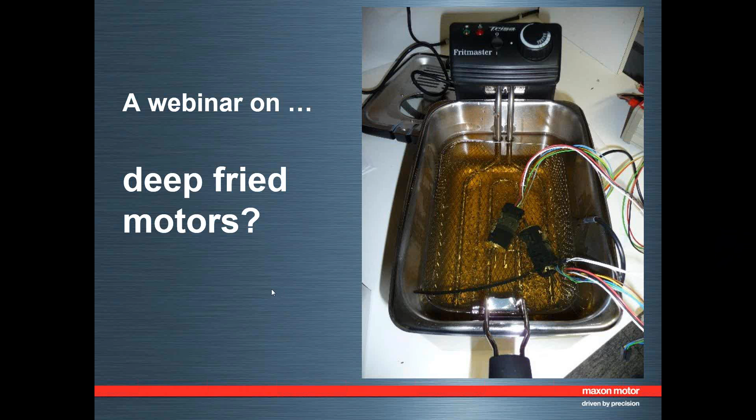Hello, my name is Kafader, and I welcome you to this webinar on extreme environment operation of DC servo motors. So we will talk about the challenges and what needs to be required by these drives.

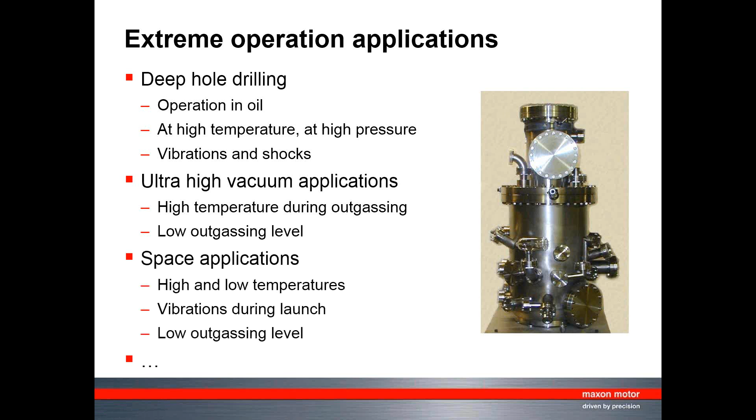Now, what are extreme operation applications? Some examples are deep hole drilling, where you have operation in oil at high temperature, at high pressure, with vibration and shocks. Another area is ultra-high vacuum applications, where the challenge is the high temperatures during outgassing before you put it into the high vacuum, and then in the vacuum you want to have a low outgassing level. A third application field is space applications, where you have high and low temperatures in very short periods of time. You have vibrations during launch, and particularly if you have an optic satellite, for example, you also want to have a low outgassing level.

Now, how do we organize this webinar? We have split it up into two parts. First, I'll give you background information on DC motors. We'll talk a little bit about how to select motors, about the key motor parameters which are needed for selection. Then I will tell you a little bit about brush DC motors versus brushless DC motors and how we ended up with this Maxon heavy-duty EC motors. In the second part, Robin will take over and he will tell you about testing of these motors, and with the testing you will see what these motors can really do and what they can support.

Okay, let's start with part one, the motor background.

When we talk about selection of motors, we have developed a systematic selection process consisting of 7 steps. For me, the most important one is always the first step. It's gaining an overview, knowing exactly what you want to do with your drive, and how the situation looks like.

In this overview, you also define what the ambient conditions are, how you want to communicate, how the control should look like, how accurate it should be, and of course how the mechanics looks like and how the load should be moved.

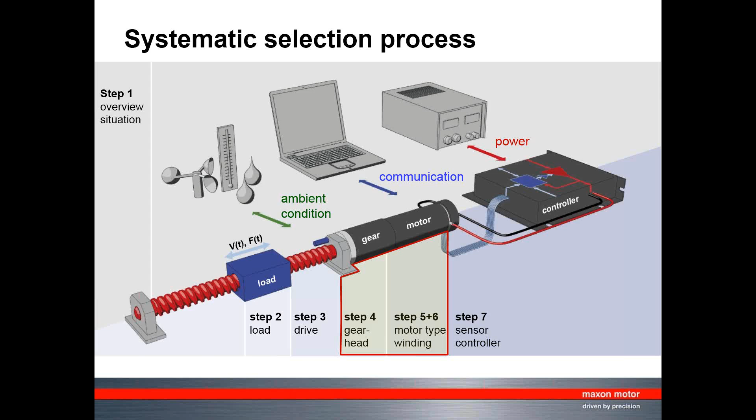One way of looking at this is considering the drive system as a black box. This helps quite a lot in the situation analysis. So you first define what you want to do, what's the task of your drive, and then you have to make sure that the outcome of your task is the correct one for what you want to do.

You also have to look at power considerations. Is there enough electrical power, current and voltage, to do whatever you want to do from a mechanical point of view - mechanical power given as force and velocity, or if you have a rotational load, torque and rotational speed.

Today we will focus a bit on the green sections here. It's about environment. What is the temperature around the motor? What is the atmosphere? Or is there any vibration?

But always think about that a drive also creates emissions, which go the other way. So a drive also creates heat, makes noise, and in some cases also electromagnetic emissions.

When talking about application, essentially at the end what the motor must do is deliver a certain amount of torque at a given speed. This is our standard diagram, how we represent such operating points of torque and speed - it gives you the speed as a function of the torque.

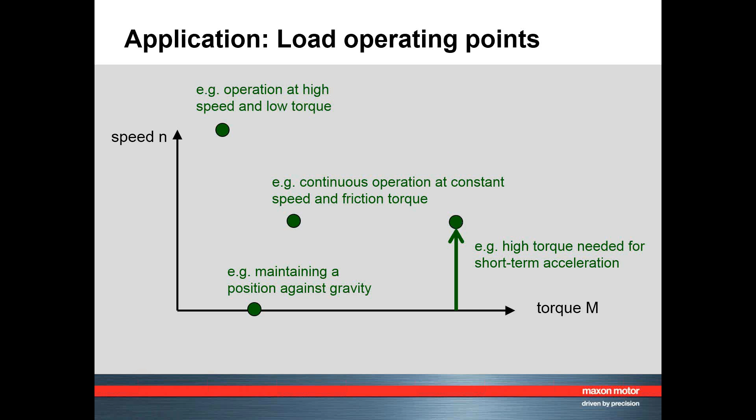Or during acceleration, you have a speeding up of your drive, which usually needs more torque to accelerate all the mass inertias. At the end of this acceleration process, you typically have the highest torque and the highest speed. Now, the first thing you have to consider is that your motor has high enough speed to cover all the operating points.

In this case here, what you can see is that the operating range is limited by the maximum permissible speed, and it cannot reach this operating point at high speed.

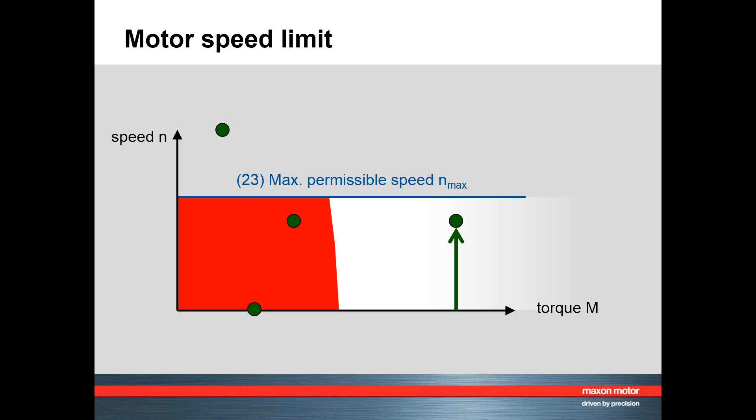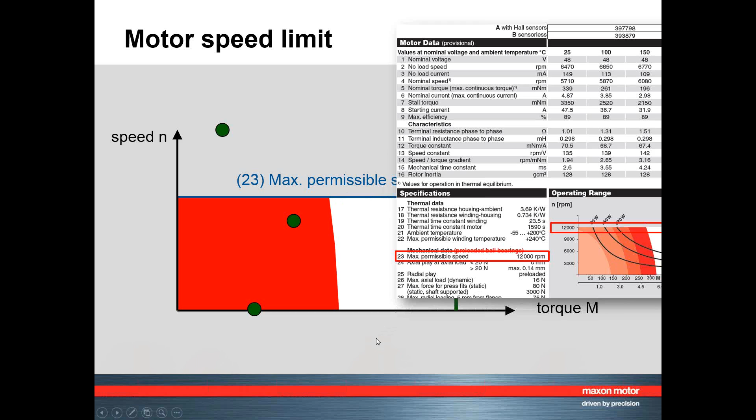You find information about the maximum permissible speed of a motor in the maxon catalog, for example in line 23, or in the diagram - this is the upper limit of the diagram. So speed usually is a simple task to find out.

A little bit more complicated are torques. How big is the torque to accelerate? How large is friction? So there's a bit more time and effort involved to get all this information.

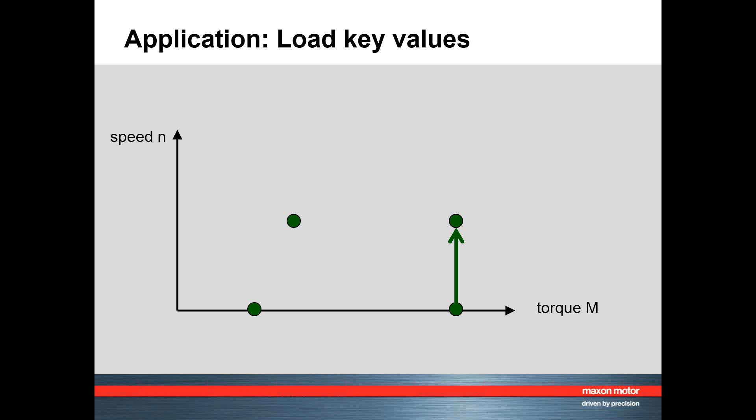At the end, if you have all these operating points, what you can do is condense them into essentially 3 values. One value is an average load. It corresponds to the root mean square average over operating cycles - that's essentially the continuous load, or in other words, the motor would heat up in the same way during an operating cycle as if it was driven with this root mean square average load.

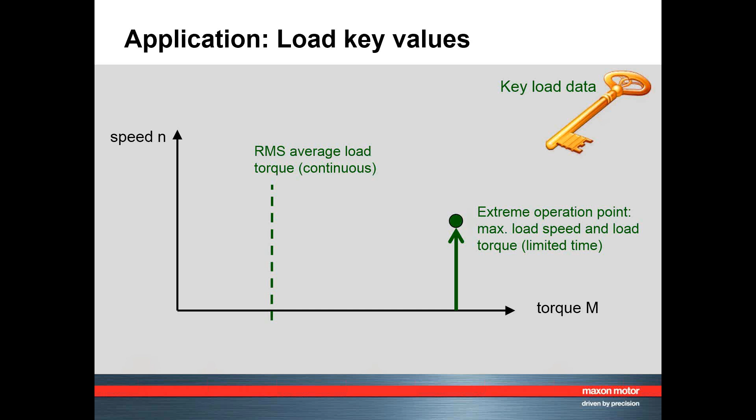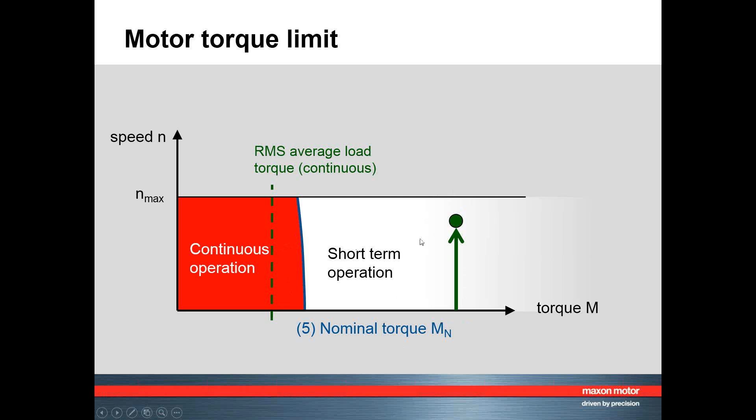Another important point, or two other key values here, is the maximum load at maximum speed, which I call the extreme operation point, and the amount of time it takes to run the motor at this point. From a torque point of view, you have to make sure the continuous operating range extends higher than this root mean square average load. So what you need is a motor with a nominal torque higher than this RMS average. Short-term operation can still be at a higher torque.

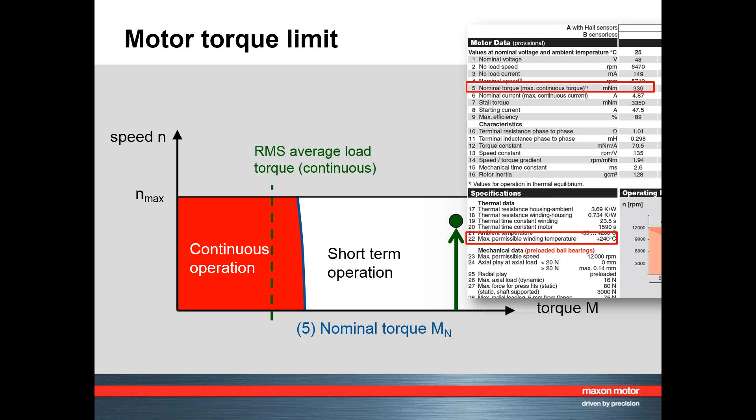Where do you find information about this? It's in nominal torque, line 5 of motor data, and the nominal torque is actually a thermal limit. So operating a motor in the short-term operating range would result in too high a temperature, and the critical temperature in motors is the winding temperature.

A very good example showing that the limits of the continuous operating range relate to temperature and how hot the motor gets is the heavy-duty motor operating range. Typically for standard motors we give such a diagram with the red area corresponding to the continuous operating range. If the ambient is hotter, for example 100, 150, or 200 centigrade, you can see that the hotter the ambient is, the less heat can dissipate, and that's why this border of the continuous operating range is reduced more and more.

It's not only ambient temperature that plays a role, but also how heat is dissipated. For example, in oil you have much better heat contact to the winding which gets hot, so heat is dissipated much better, which in turn means you can have much higher torque operating such a motor in oil than in air. This is exactly the same motor, once operating in air and here in oil, and you can see from the scale of torque M that you can reach much higher torques when operating in oil.

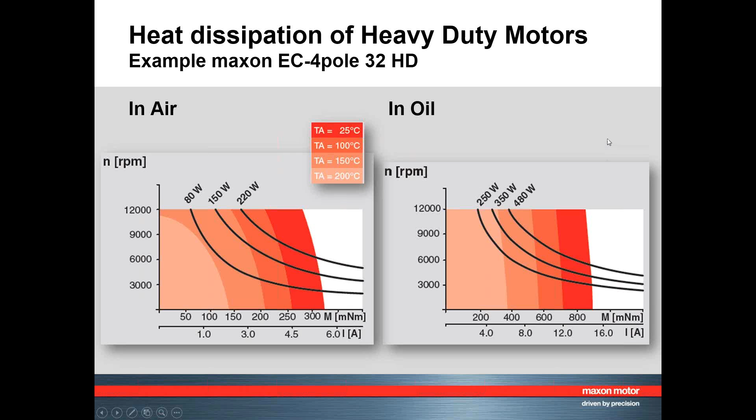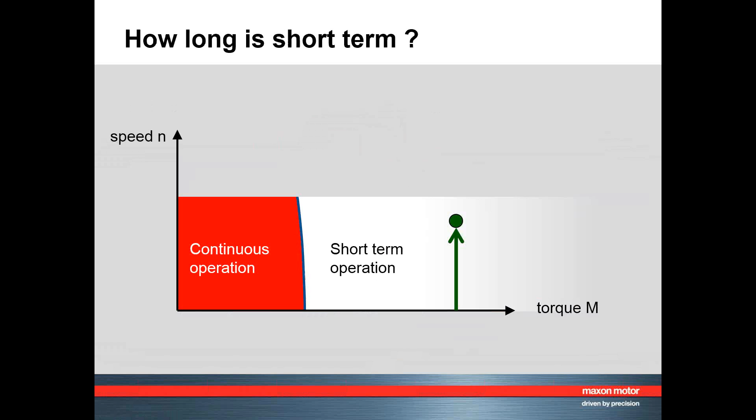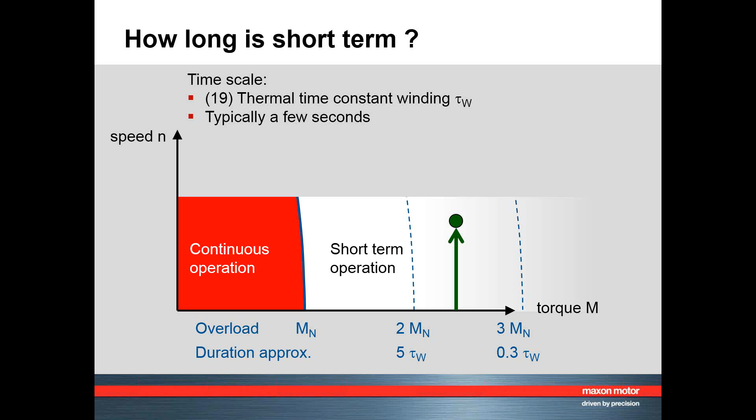As I've mentioned, you can run the motor at higher torques, but only for a limited amount of time, and the big question is how long is short. It all depends on how fast the most critical part of the motor, the winding, heats up. This is given in line 19, a number called the thermal time constant of the winding, which gives an internal time scale of the heating of the winding. For this motor, for example, it's a little more than 20 seconds.

What does this mean, or how is this diagram to be interpreted? You can see that you can load the motor up to twice the continuous load quite easily, and for quite a long time, about 5 times this thermal time constant. For this motor, that would correspond to approximately 100 or more seconds, almost 2 minutes. So short-term operation can be quite long as long as the overload is not too high.

But you can also see that at 3 times the continuous torque, the duration is much shorter than this thermal time constant of the winding. So essentially, between 2 and 3 times the continuous torque, the allowed time is reduced quite a lot. As a rule of thumb, at approximately 2.5 times the continuous torque, it's this time constant that determines how long you can overload your motor.

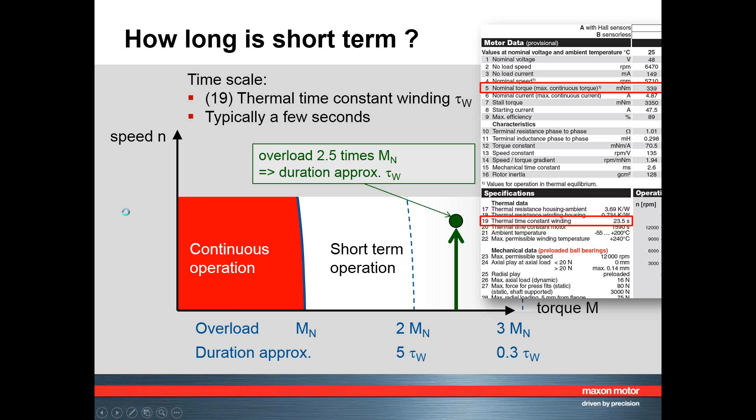So we've been talking about torque and speed, and how about current? The most important thing to know is that motor current is proportional to the produced torque, with a proportionality given by the torque constant. Essentially, for each torque value there is a corresponding current value, and that's why you can draw a current axis in parallel to the torque axis down here. You find the necessary information directly here: for the nominal torque there is a corresponding nominal current, and the torque constant is in line 12.

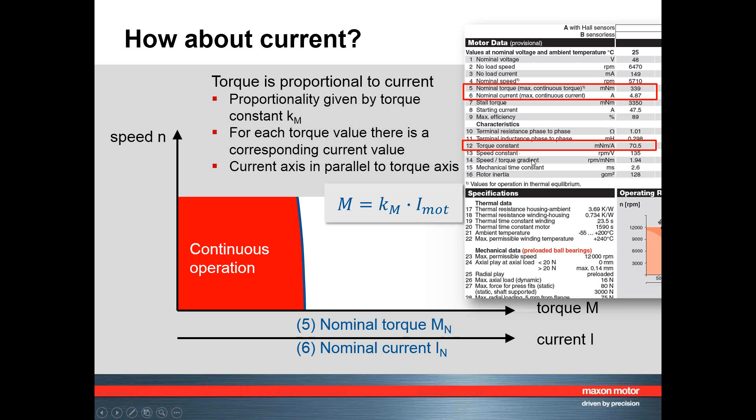What happens if your current is limited? For example, you have a driver with a limited amount of current, a continuous or short-term current limit, or a power supply with a limited current. Of course, as we've learned, limited current means limited torque, so in our operating range diagram these areas are reduced. For our situation here, the big question is how can we accelerate, because we don't have enough current to do this acceleration. So probably you will have to accelerate at a lower rate.

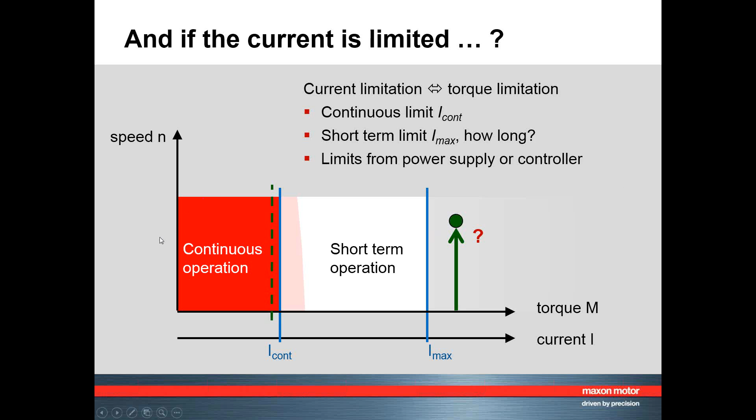Okay, after this introduction about motor data, I'd like to show you the two main construction principles of DC motors. First, the one with brushes.

The magnet which is needed in here is fixed on the flange, and goes into the winding.

The really nice thing about brushed DC motors is that's the most simple motor to run. All you need is a DC voltage. You connect the battery to the motor and it runs, it turns, and the higher the voltage, the faster it rotates.

The other concept is a brushless DC motor. In the brushless DC motors, you don't have brushes. That's why the winding cannot rotate, so it's on the stator part and is in close contact with the housing. This has one advantage: much better heat dissipation.

The other point is that on these motors, it's the magnets that are mounted on the shaft and rotate. What you need to drive such a motor typically is some Hall sensors which give information about the position of the magnet, so that with suitable electronics you can drive this motor.

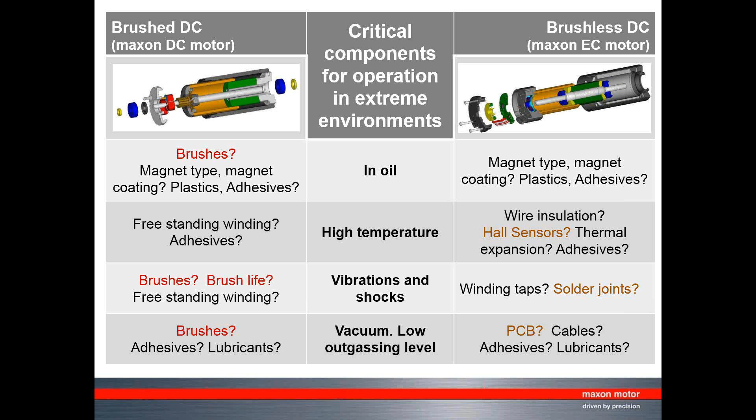But if you compare the two, I think you can see that it's probably much easier to create a brushless, or as we call it, EC motor into a heavy-duty motor.

First thing, avoid any glued connections, and that's why our heavy-duty motor essentially has a lot of stainless steel parts, components which are welded together with laser welding. This gives a very robust design.

Then next thing you have to think about is cable insulation, any plastics you're going to use in the winding or in the cable that go into the motor. You also have to think about winding taps, which are fully potted to avoid them loosening under vibration.

You also have to think about the printed circuit board, making it stronger for high temperature, and also check the Hall sensors so they can support the high temperature. And the last point is to encapsulate the magnet so it never sees the harsh environment, and use a high temperature magnet material.

Very similar things apply if you want to make a gearhead heavy duty. Again, avoid any adhesives, as press fit only will not be well suited for high vibration. We use stainless steel components which are laser welded inside and outside the motor. For applications in oil, we add holes so the oil can flow in and out.

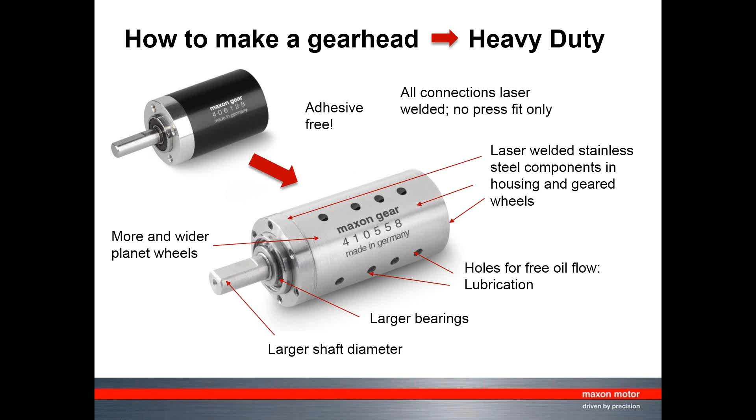This does the lubrication and takes away the heat. So this all helps. And of course, to make a gearhead very robust, you have to think about using special planet wheels inside, a stronger bearing at the outside, and a larger shaft diameter to make it really, really strong. So these were the steps we made, and now in the second part I pass the microphone to Robin, and he will tell you about testing of heavy-duty motors.

Okay, so the second part of this presentation is really going to show you a little bit about how we went through the development process for these motors and the kind of testing that we did in order to demonstrate that they really are suitable for the environment that we want to operate them in.

So I'll just start off on a couple of components, because effectively that's the level that we would start off in the development process. The first question we had to ask ourselves was, how do we come up with a Hall sensor that can be used at these high temperatures? Because as I'm sure most of you are aware, nearly all of the Hall sensors that you get on the market are only rated to slightly over 150 degrees C.

Because we have lots of different types of Hall sensors here for our standard range of motors, we decided the best way to approach this, given that we couldn't find any suitably priced 200 degrees C rated Hall sensors, was simply to test all of the ones that we have. We tested about 20 different types and came up with one type that had the best promise at high temperatures, and therefore we ran lifetime tests on those.

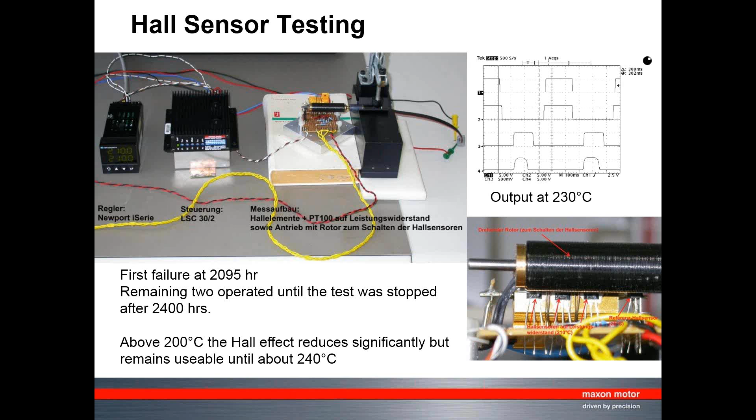The rotor, which Urs briefly touched on earlier, where he said one of the things we do is remove the adhesive from it and encapsulate it. What we actually do here is take a solid cylinder magnet and then shrink a tube over the top of it. Then we take two shaft stubs and push those in from both ends, weld them shut, and then grind them to get everything perfectly concentric. That's how we have our fully encapsulated rotor.

But what we need to do there is confirm that all of these joints are going to be suitable for the stresses they're going to see. So what you're seeing here is what we called our rotor torture test rig, and this just twists it backwards and forwards with 6 Newton meters as the torque rating used here.

This is factors of 10 more than the motor is capable of delivering, and we did 13 million cycles before abandoning the test.

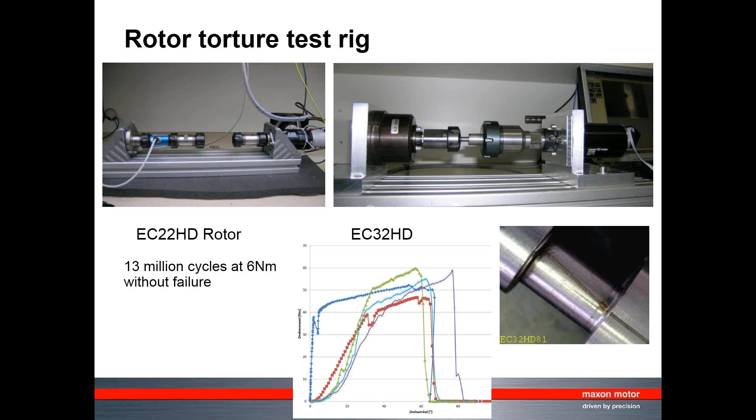Because we don't have exactly the same expansion coefficients for the magnets and the housing, since they're different materials, we had to confirm that over the full temperature range we still have the press fit, because otherwise the magnet will rotate inside the housing.

So we first performed 10 temperature cycles between minus 55 degrees C and plus 300 degrees C, so the material has a chance to go into the slight plastic deformation it will have at very low temperatures. After doing that 10 times, we heat the whole thing up to 300 degrees C, and then try to forcibly rotate the magnet inside the housing to confirm that the torque required is significantly more than the stall torque of the motor.

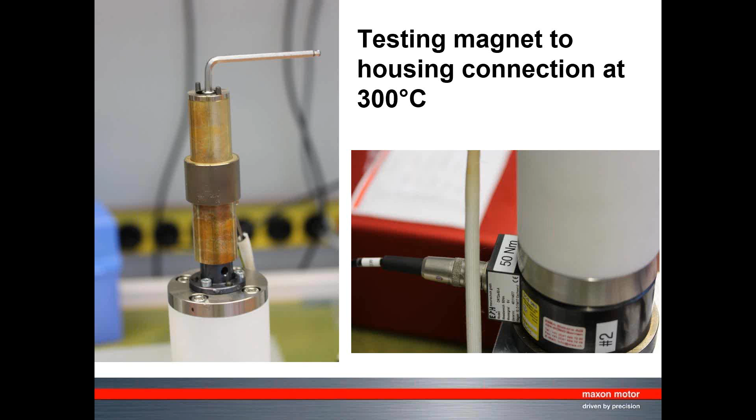So that's just two examples out of many I could have shown for the overall testing of the components.

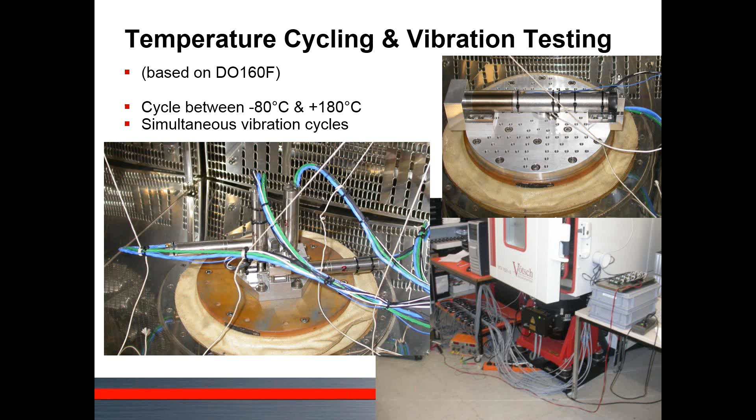Then comes the question, how do we do the testing in oil? Originally we looked into the formal test facilities you can buy for doing that, and decided they were far too expensive for us at the beginning, when we didn't know whether we were really going to have a market in this area or not.

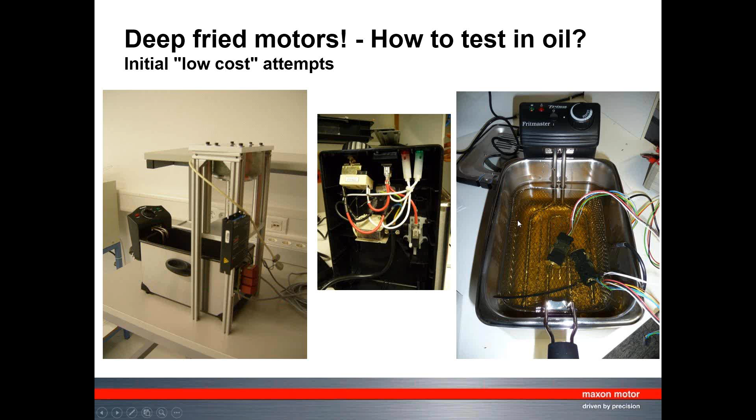So we started off simply with standard deep fat fryers, which we filled with hydraulic oil rather than chip pan oil. We modified the circuitry on them to enable us to heat them up beyond what the manufacturers originally intended, and ran our tests like that. As soon as we saw we were going in the right direction, we moved on to slightly more sophisticated fryers.

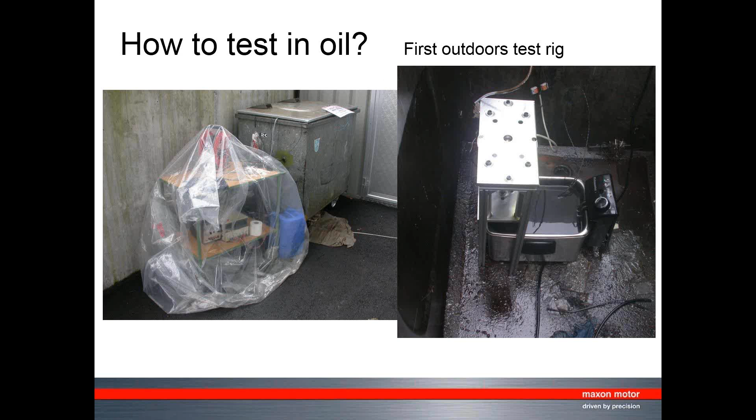Running them outside because of the amount of smell we were producing. Only after we'd demonstrated that we were capable of building motors and that there was actually a market for them did we start to invest in more formal equipment.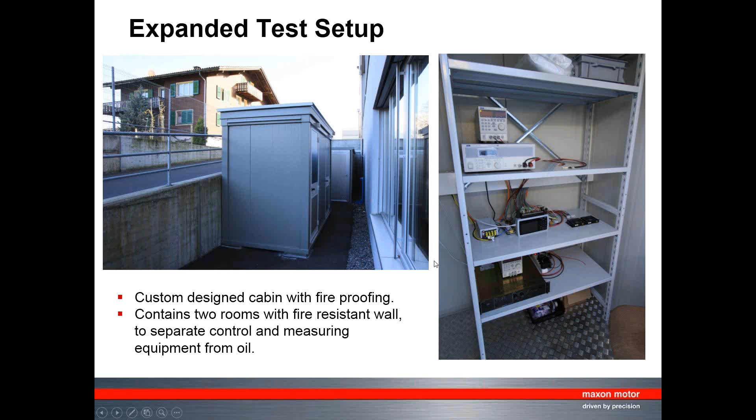We moved on to laboratory heaters. We had this kind of standard configuration to start with, where the motor and gearbox are mounted at the bottom, and then a brake is used to simulate a load on top.

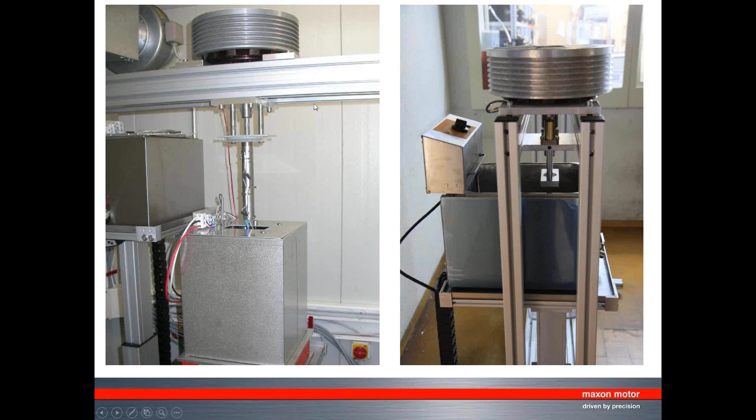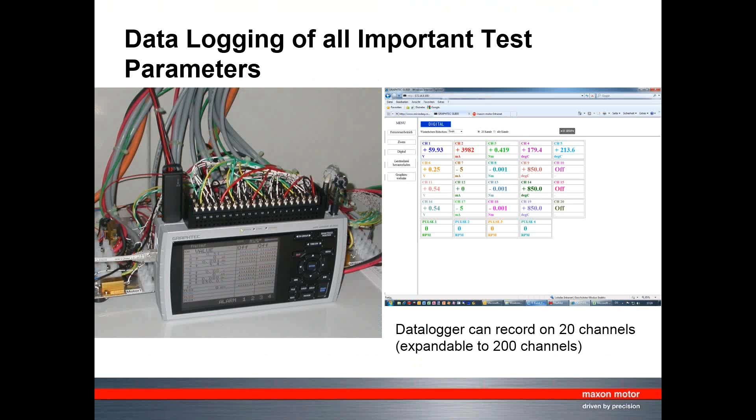Then we started adding different sizes, so these are brakes needed for the higher torque, larger motors in the series we're doing. There's a bunch of logging equipment to collect the data as we run the tests. This is the current setup we have, where there are now 4 of these test rigs in there.

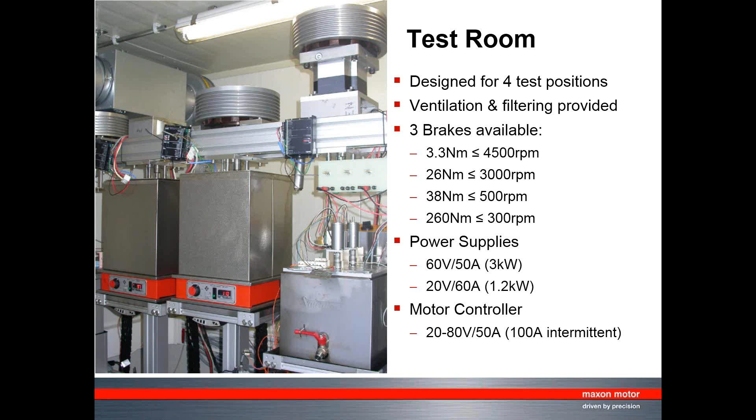We have fairly deep oil baths, different size brakes on top, capable of going up to a couple hundred Newton meters, sized for the maximum torque you can get out of the gearboxes in this size range that we produce. And then, of course, all the associated control electronics.

I'll pick out a couple of interesting test results worth mentioning. One is no load current in oil. The green line represents the current the motor draws at a particular speed when running in air. As soon as you immerse these motors in oil, you get additional friction drag for the rotation of the rotor internally to the motor.

There's something of a conflict here between an optimal design — in all our standard motors, what we aim for is the smallest possible air gap between the rotor and the winding, because the smaller the air gap, the better the magnetic fields interact between the permanent magnets and the electromagnetic field produced by the winding. That's how you produce a high power compact motor, by keeping this gap as small as possible. But if this gap is small and filled with a viscous fluid, you get a significant amount of extra drag.

Then there are two factors that come into this. One is the temperature of the oil — the viscosity decreases as you increase the temperature, so that works in our favor. Then unfortunately, as you increase the pressure, you also increase the viscosity again, so that works against us.

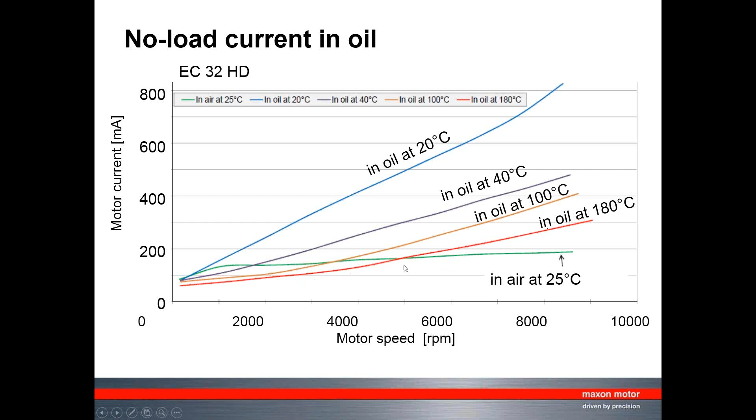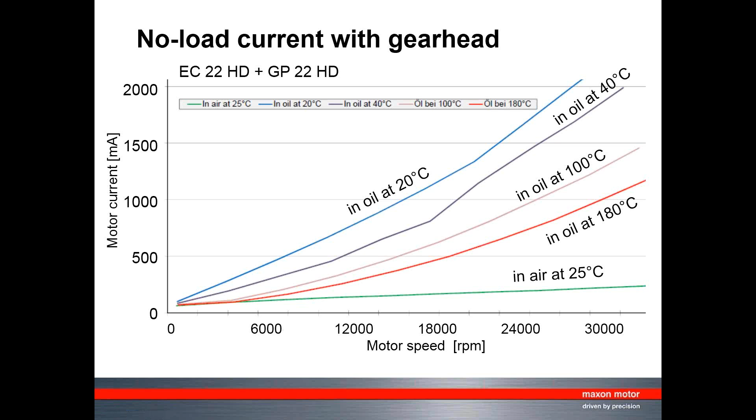One of the things you have to be careful about when laying out your overall design is restricting the motor speed and not letting it go to too high speeds, which means juggling with the gearbox ratio you choose. If you have a gearbox in there, this graph looks like the situation is worse, but it's not really, because it's just going to higher speeds. The vast majority of applications we see customers using these combinations for are down at the 5 to 10,000 RPM range. But it's certainly an issue you have to consider when sizing the correct type of motor.

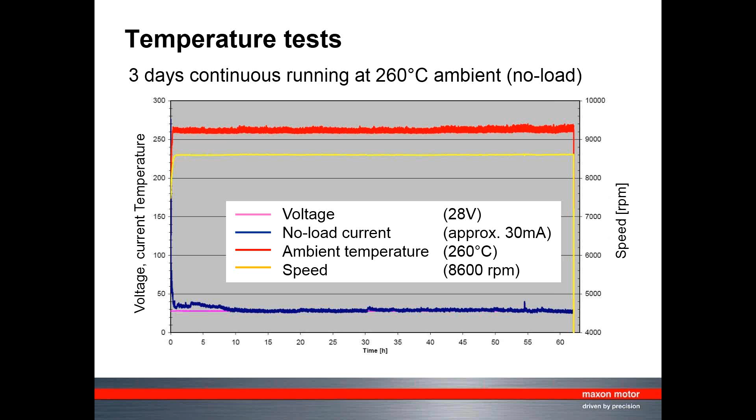Picking up here a couple of initial test results - this one's about 5 years old now, from when we built the first running samples. In a no-load configuration, we were able to put them in the oven at 260 degrees C and run them continuously for several days. Now, we don't actually rate them at this temperature in our catalogue - we have a certain margin. We suggest a maximum winding temperature of 240 degrees C, which lets you place the motors in an ambient temperature up to a little over 200 degrees C and still get a 30-degree margin for the winding as it heats up doing work. So you can still get quite a high power output in a 200 degrees C ambient surrounding. The higher you go - all components in the motor are rated to 240 or higher, so you can go all the way up to 235, but then you only have a very small amount of extra heat allowance for the winding.

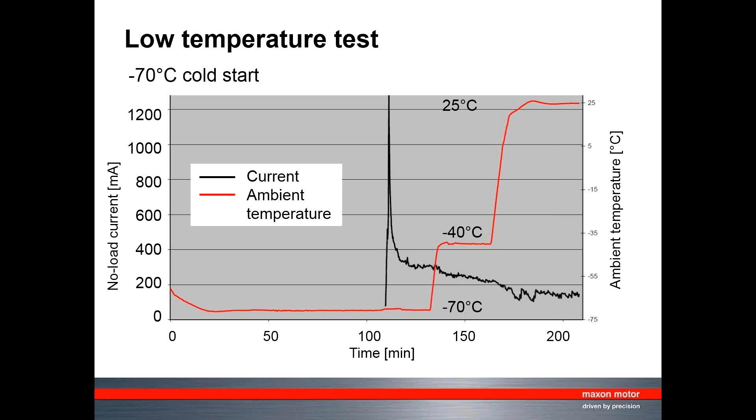We've also done cold temperature tests just to demonstrate that cold temperature starting is not an issue. You get, as you might expect, at minus 70 degrees C, a short burst of high current draw whilst the grease gets moving, but after that there's no real issues.

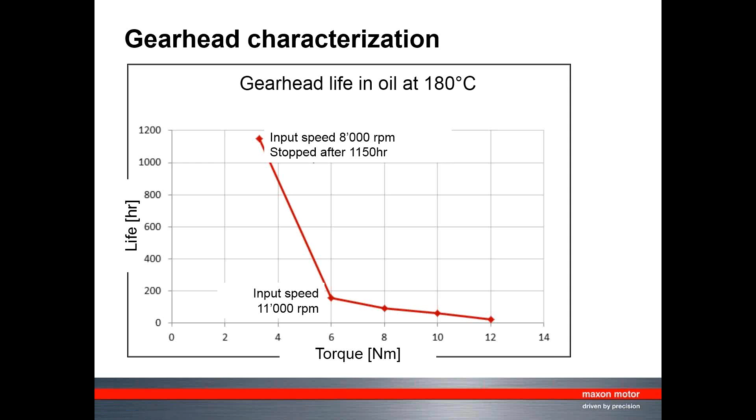One point worth noting: the oil operation we do, because we don't have a sealed system here the way most field applications would, the oil gets very dirty and oxidizes, so we end up running in significantly worse quality oil than a real application would.

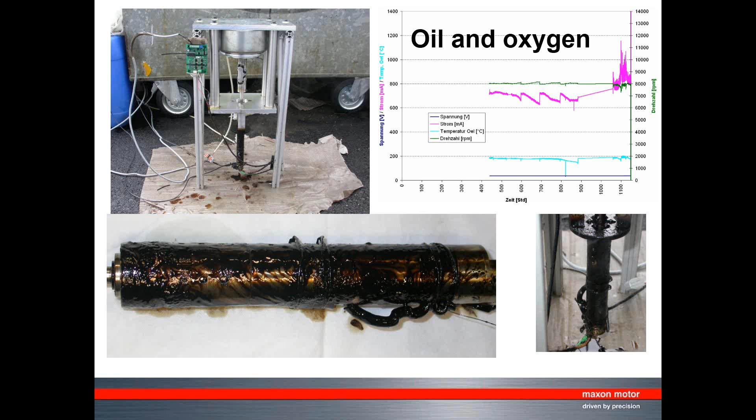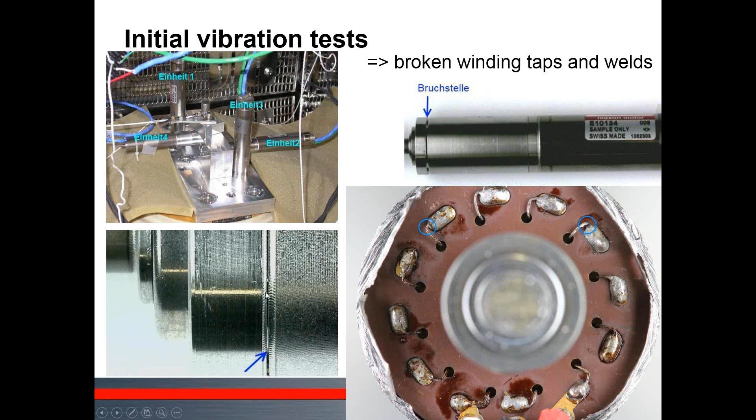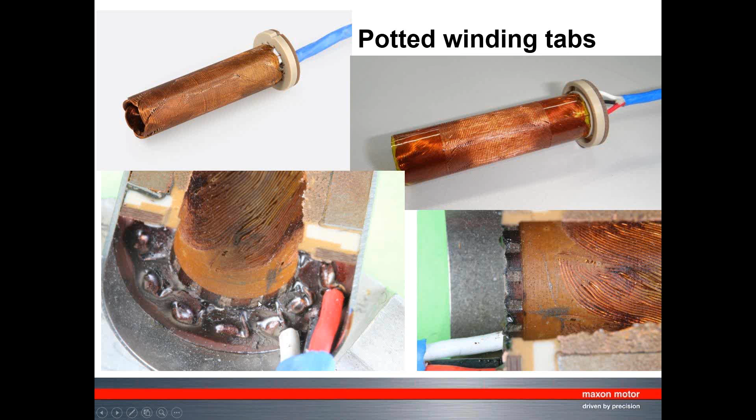I thought I'd show some of the learning experience we went through during early development a few years ago - of course we didn't get everything right the first time. Vibration testing showed us that, especially at low temperatures, we had to be careful that the winding taps don't break under vibration if they're not potted the way it's shown here. The original press fits and welds weren't deep enough to provide the strength for the joint at the front, so the solution to the winding tap problem was to pot the winding. Here we've cut open one of the windings, and you can see the top section is now filled with adhesive - the top left here is before it's been filled, where you see the little bits of wire, and after potting, this is what it looks like, covering the top section as well.

We then extended that about 3 years ago to potting the entire winding, because of issues we were having where the oil was being dragged at high speed over the surface of the winding, and particles in the oil, if it wasn't perfectly clean, were gradually stripping away the insulation on the winding, eventually leaving blank wires. So to solve that, we now pot the entire system, including here.

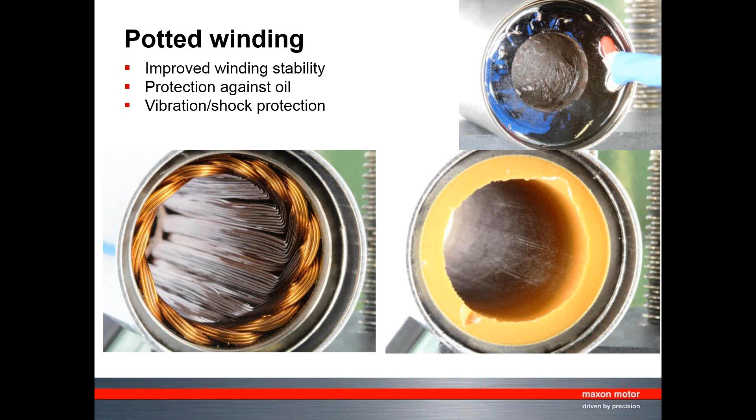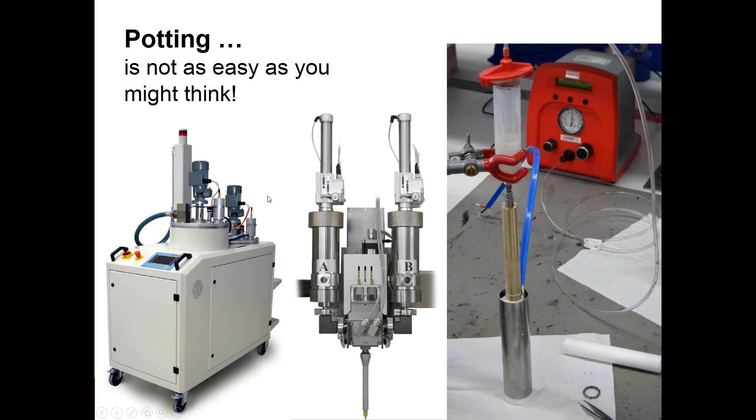So here's the circuit board ends. You can just about still make out the remnants of the taps under there, and this is the bottom end. So the left and right pictures here are basically the same thing before and after potting. We started off doing this in a more laboratory style, and are now moving on to having automated machines doing that as we move into more volume production.

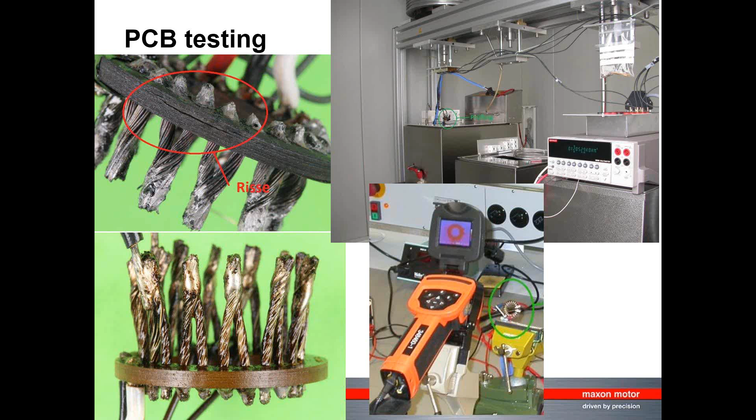We also noticed, as I think many people in the oil industry know, the type of hydraulic oil that you use is key. We didn't have this experience here, so we just started using various different types, some recommended by customers, some we suggested ourselves, and we discovered that you can really have a big difference as to how long the exposed parts of the windings or of the electrical system work, because the solder is attacked.

As you can see, these are the same solder joints before and after a 700-hour test, I think this was. You can see the way that the Panolin on the left here has eaten away at the solder joint. This was also one of our motivations for then fully potting the system, so that you're basically free as a customer to use whatever kind of oil is good for the rest of your system without the motor constraining that.

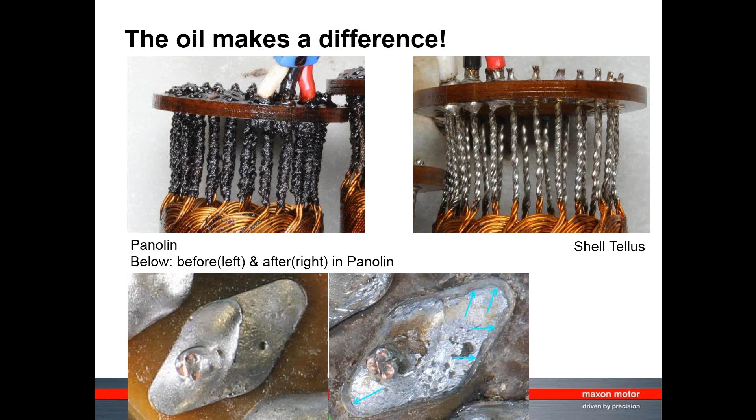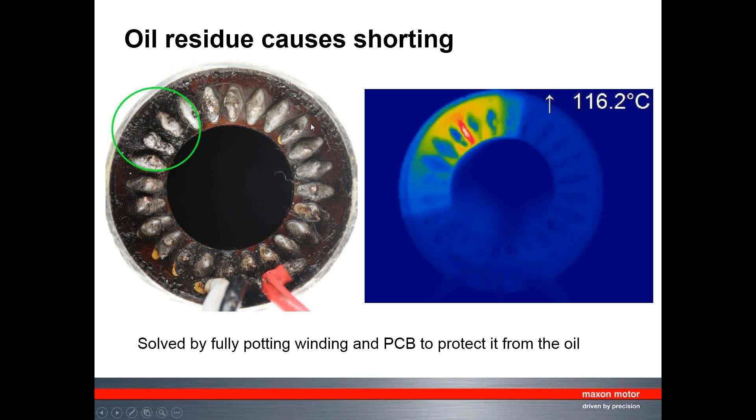Another discovery from a few years ago, new for us but I know not necessarily new for you, was that if you don't leave sufficient gaps between unprotected areas, you can get carbon build up between them, and this carbon build up then of course starts conducting, and eventually leads to short circuiting. So again, this has now been dealt with by fully potting this.

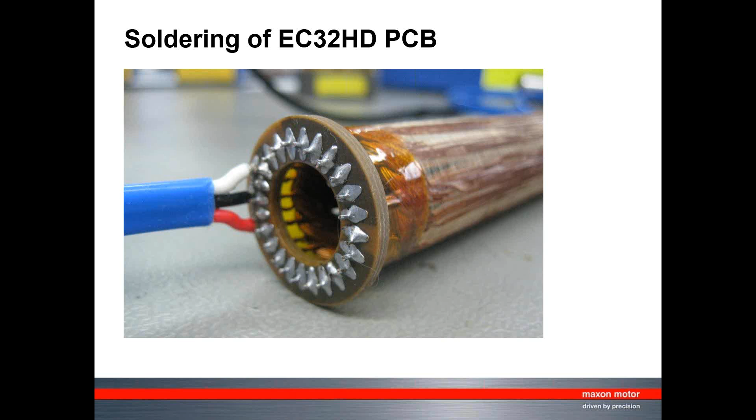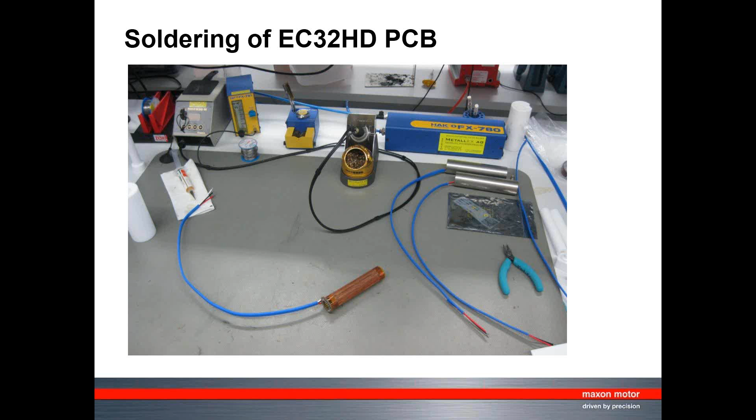The soldering standard that we're following is the IPC standard, where we aim for class 3 standard solder joints, as required for extreme environment applications and ones where failure of solder joints can't be accepted. This requires things like new soldering stations where we can also heat with hot nitrogen air, and then we use jigs to also heat up the winding, because otherwise, given the thickness of the winding taps and the PCBs we're having to use here, you can't get enough heat in through a conventional soldering iron alone.

This is one of my favorite tests for stressing all the joints. What we do is take the motor, run it in air so that there's minimal cooling, attach a flywheel to the front, basically an inertial mass, and then switch the motor backwards and forwards between clockwise and anti-clockwise rotation at the maximum speed or duty cycle we can apply to cause the winding to heat up to 240 degrees C. This means you're applying tens of amps every couple of seconds to switch the direction of the motor, and that causes a huge shock on all the components connected together as the torque direction changes.

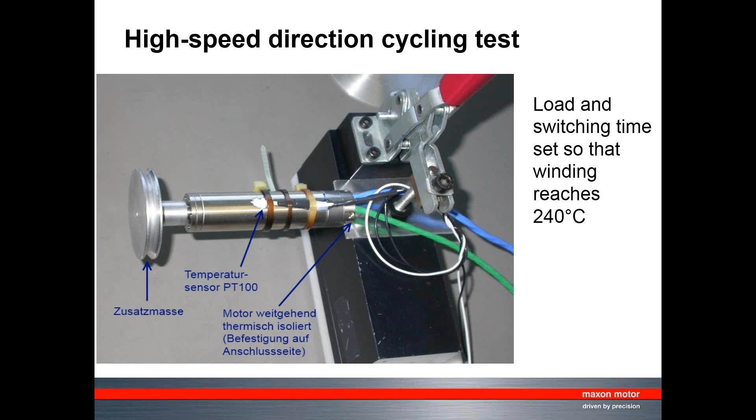This plot shows how we ran 3 million cycles before the bearings, in fact, were what caused the failure in this test.

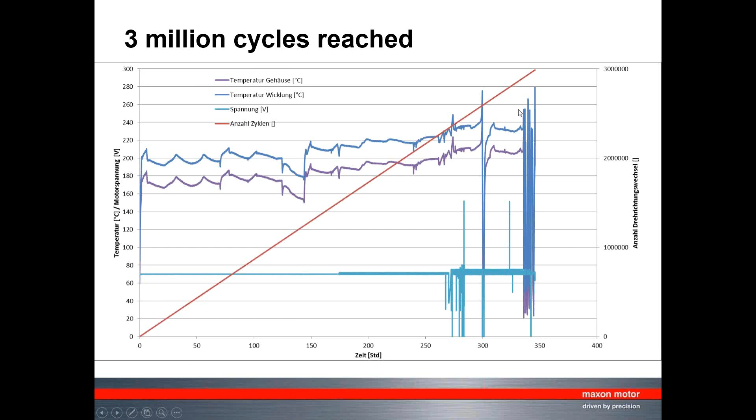Urs mentioned a couple of other applications that are outside of the oil industry. One of them is UHV applications.

The reason the motors turned out to be suitable for ultra-high vacuum applications is simply because we've got rid of nearly all the plastics. The only adhesive that's still used is to bond the winding and perform the potting, and that's all the same type.

And of course you can bake that. You can then bake these motors at very high temperatures, so you get rid of any residual material or contaminants that's on the stainless steel surfaces.

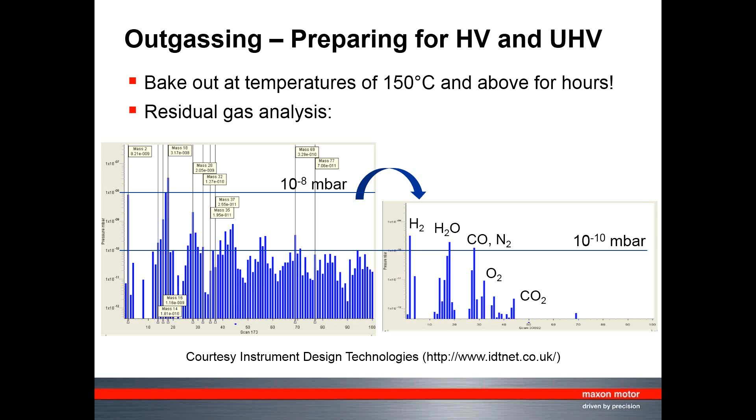Just to finish off, a quick summary of what kind of products we now have available. We've built these up over the last 4 to 5 years that we've had them on the market: 3 basic sizes - 22 millimeter diameter, 32 millimeter diameter, and a 42 millimeter diameter motor.

There's matching gearboxes, so planetary gearboxes, ranging from about 3 to 1 to about 1,000 to 1 ratio. The motors themselves are done in different lengths depending on the amount of power you really need out of them.

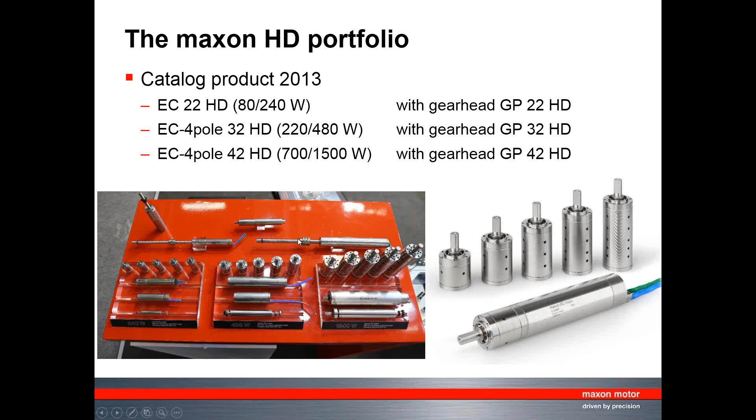Then we also have screw drive models where the gearbox has an integrated either ball screw, metric screw or trapezium screw. So basically this can be any kind of screw type that you define.

The key thing to note about this is that the axial bearing, or thrust bearing, is integrated into the gearbox. It's not just attached through standard rotary bearings or ball bearings, but it's one that can absorb the several thousand newtons of load and still deliver the long lifetime.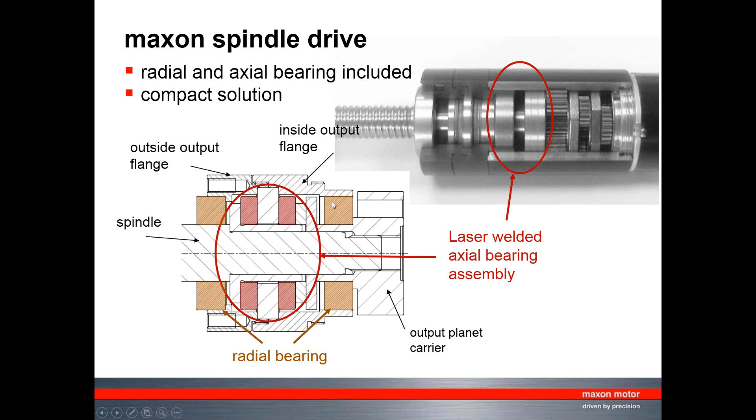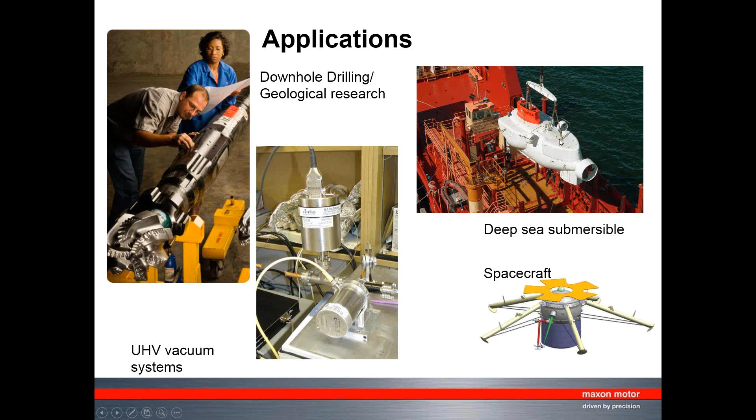I think we've already mentioned a little bit about the applications. The main ones that we've sold the products into so far: the biggest area is the oil industry, then the next biggest is UHV, and then the two smaller ones at the moment are deep sea submersibles and spacecraft applications.

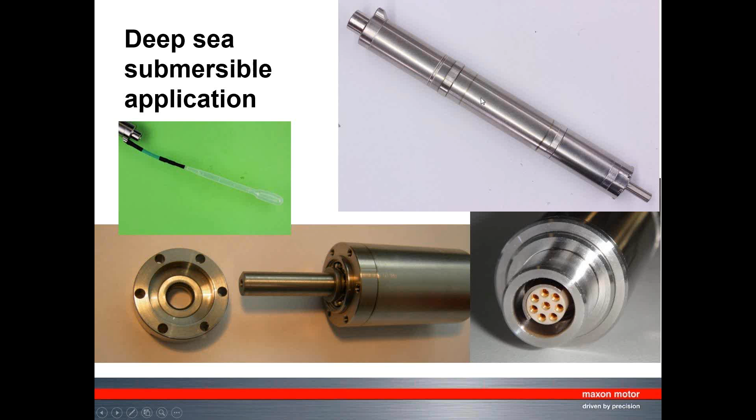And so this can be placed directly in salt water, and so this is actually the motor running in salt water, and we demonstrated 4 weeks of continuous operation in here before the connector on the back corroded away, because the mating connector for the test was not an underwater rated one.